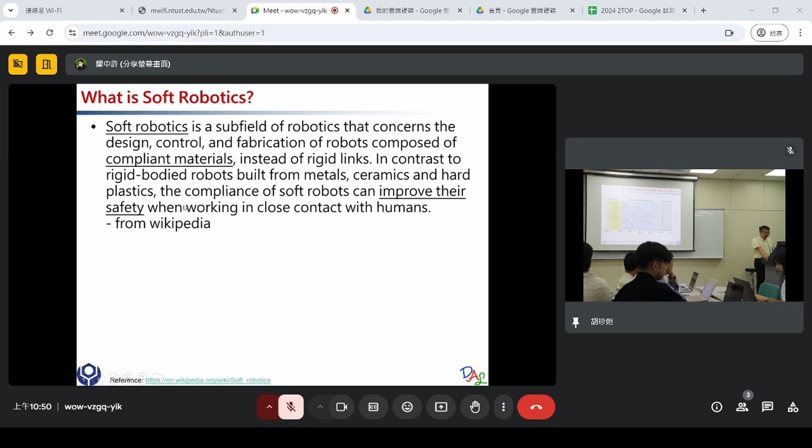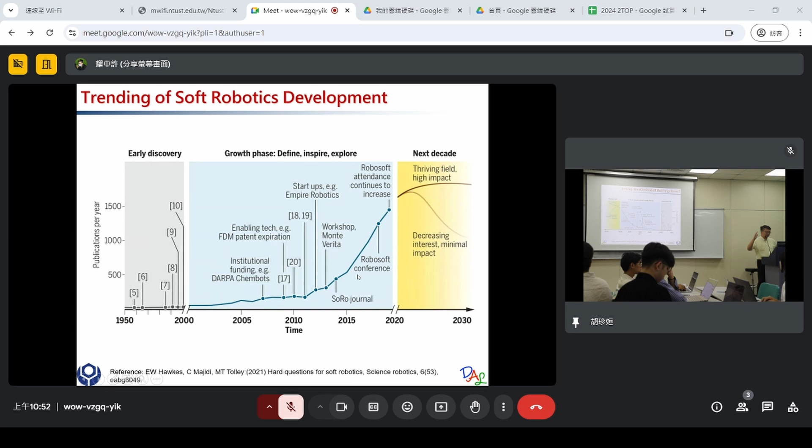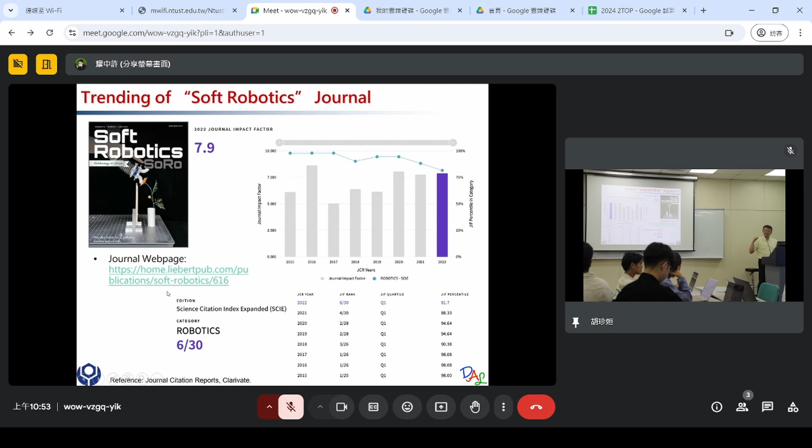Okay, so there is even a new journal. For professors, we need to write research papers and publish in a journal. There's a journal called Soft Robotics. So what does impact factor mean? Every article, every year, will be cited by other journals how many times on average. So every article inside this journal will be cited by other journals around 8 times. So there's an 8 times impact to the world. In the robotics field, this is very high, almost a top 10% ranking in robotics. So just to let you know, in the past it was not that hot, but nowadays it's very hot.

Okay. So I dissect soft robots into many different categories. We can take a look at each one of them. Let's start from the upper right corner. So if you want to make something soft, you need to worry about the materials.

Like some of the materials are listed here. PDMS is a very friendly material. I think we will use it. Do we? No, we don't use PDMS this time. But in many research, people use a polymer called PDMS. It's a kind of like a glue, and there are two bottles, and there's a specific ratio. When you mix them together, it will be solidified.

So originally, it's like a glue shape, like liquid, but with some viscosity. You can easily pour PDMS, uncured PDMS, in any container, and once it's cured, becomes solid, then you can shape it. So this kind of technique is like a molding technique. Also, Ecoflex is another kind of polymer. It's very soft, softer than PDMS, and also silicon rubber. Or nowadays, you can even print soft materials such as TPU and some other materials.

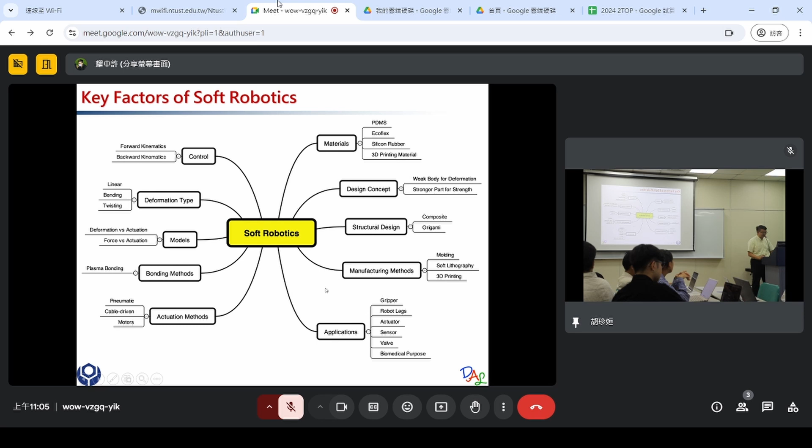Okay, so over here, there are some popular soft materials. PVDF is a pretty common, very famous one nowadays. It's a kind of piezoelectric material. PZT, also piezoelectric, and shape memory alloy. There are metal types and some other types. Carbon nanotube, very hard but very small. Over here, there are some shape memory polymers as well. Elastomers, soft ones.

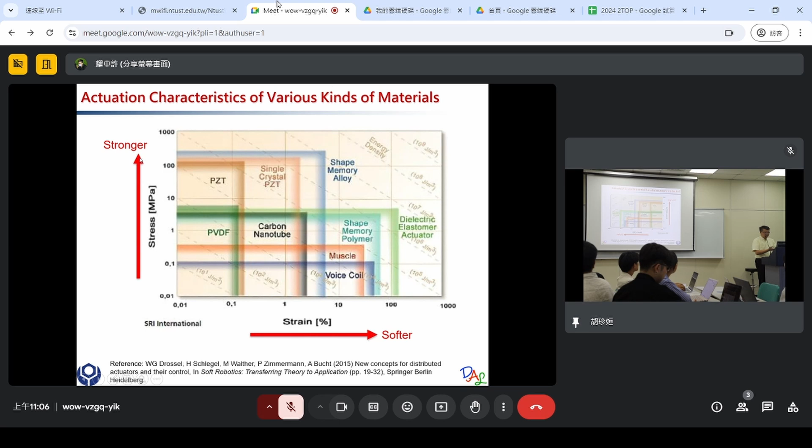So in this map, you can see we can design the softness of the structure by choosing a proper material. And each material has its limitation; its softness is within a range. So maybe you need to know about the material in advance. And once you choose a material, it can only achieve certain goals. It cannot be softer or harder. And also from this map, if it can carry greater stress, usually it's a stronger material. Okay, so there are some references on the internet you can go check out.

Now, some more examples, and also help you to know about the difference between how you drive the soft robots. These two examples are the cable ones and the pneumatic ones.

In this first particular design, this researcher used three different motors to drive the cables, and the cables were penetrating through the structure. So the structure has a hydrogel body, so it's a flat. It has a soft body inside, and at the tip, the cables were tightened at the tip.

So once you pull, you shorten the length of the cable inside the body, so certain part will be compressed because you apply different amount of forces at different parts of the cable. Then you generate a different pulling force inside the body, allowing the entire body to bend towards certain direction. Right. So that's a really interesting idea by combining soft structure and also cables.

This is a different example using air pressure. So this is like an illustration of the soft robot where you will see different areas of air chambers, like air bubbles. And you can have pressure control for each one of them by turning on or off, or enlarge or decrease the pressure at different channel. You can allow different deformation here and there. So because of the deformation, this whole soft body will be changing its shape.

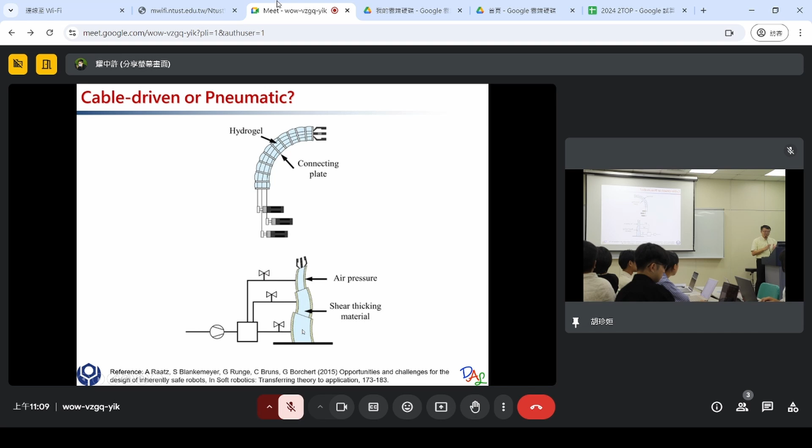But for soft ones, sometimes when you increase the pressure, it doesn't deform at the beginning. Once the pressure reaches up to a certain level, the soft matter starts to deform. So the structure dramatically deforms. So from there, you can tell the way to control the soft robot is more difficult because it's not linear. The relationship sometimes is not linear. So that's why people are working on soft robots right now.

Let's talk about the functions. If we have soft robots, are they strong enough? Can they help us carry heavy objects? And how often do we use it? Because for rigid structure, you can have thousands of motions repeatedly without breaking. But for soft ones, soft material may have an issue of fatigue if you deform too many times.

Think about rubber band. If you pull the rubber band multiple times, there's heat generated inside the rubber band, and also the heat will weaken the material property. And after just several times, maybe the rubber band will break, even though rubber band has a good potential of large deformation. Usually, rigid body doesn't have large deformation unless you build a large one.

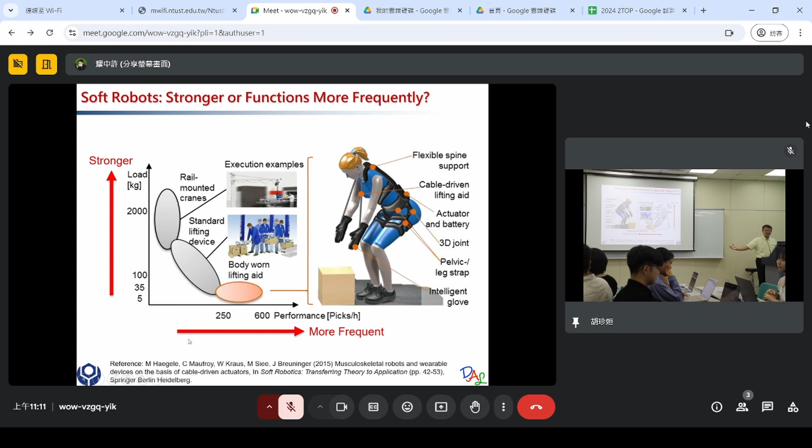But what's interesting about soft material is that you can elongate its size, but it can break. So you also need to think about your mechanical design. Do you need the structure to be strong enough, or do you need the structure to be able to deform for a lot of times? Okay, so those are the things you need to think about.

But if you try to put something in your body, you want those materials to be compatible to human, right? So designing a soft robot is not that easy. It's not like you only need to worry about strength, fatigue, shape, deformation, control. Not only those, you also need to think about when you use it. Do you need to worry about the environment? If you put it inside your body, then does it harm a human's body, right?

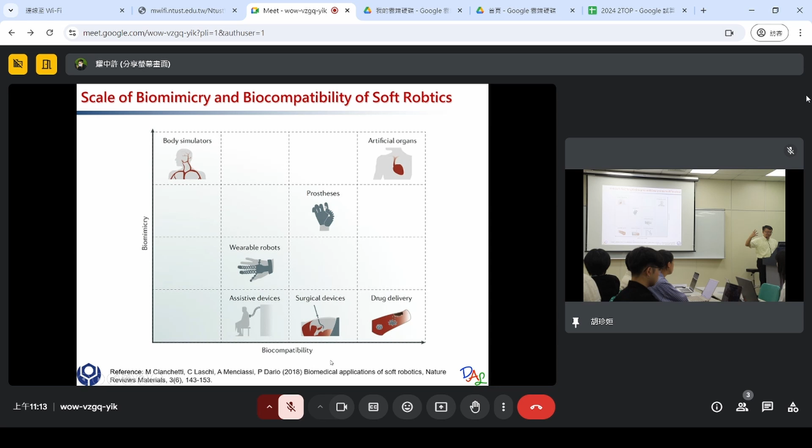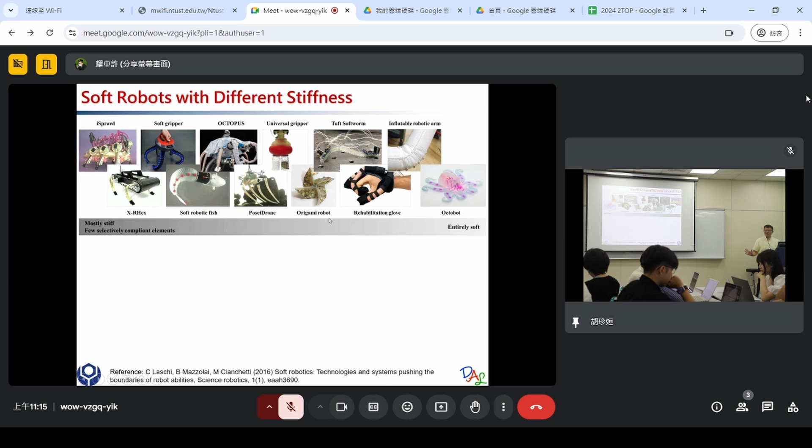So, very smart design. Over here, you can also learn from researchers. Read more papers in the following days. If you don't know how to start, learn from what has been done. Maybe there's a design that has been done in a different field, but one of the key ideas can be implemented in your own design. We will show you what we have built for the project, but that's not the only way. You are allowed to make your own design. We will be here to help you, not to say no to your design. You are free to be crazy.

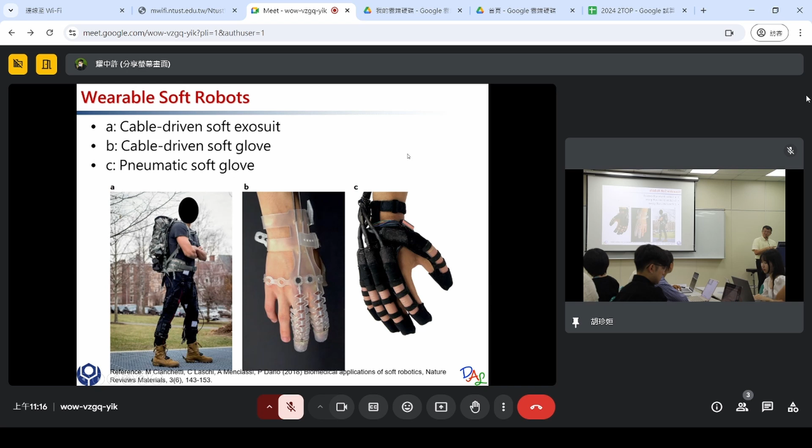Okay, so this is very similar to what we are trying to build this year. Wearable soft robots, mostly the middle one and the right one. Sometimes people build this kind of soft glove for rehabilitation, to help patients actuate their fingers. Sometimes they have difficulty bending their fingers, so they need to rehabilitate them. So the goal of this year's topic is to build this kind of soft glove, and we will use pressure to control how much bending you create. This is one solution. You can have new solutions. More details will be given later on by the TA.

Now, focusing on the pneumatic actuator, usually we try to have air channels inside soft materials. But think about this. Soft materials are usually polymers. So before they're cured, they are in liquid phase, like glue, right? You have a bottle of glue. If you pour the glue into a container or just onto the table, some time later that portion of glue will solidify and become solid. But there's no channel inside. It's just a piece of soft matter without any functional channel inside.

So the important thing for a pneumatic actuator is that you need to generate air channels inside. So how do you generate air channels? Maybe you can have a container and put something inside to block some area of the material. Once it's cured, take away what's inside. Then you have an air channel. Maybe that's a good way. But if the channel has a very complex shape, you cannot take it out. Then what do you do? So usually in the field of soft robotics made of polymers, they try to think of crazy ideas for having air channels inside the soft material.

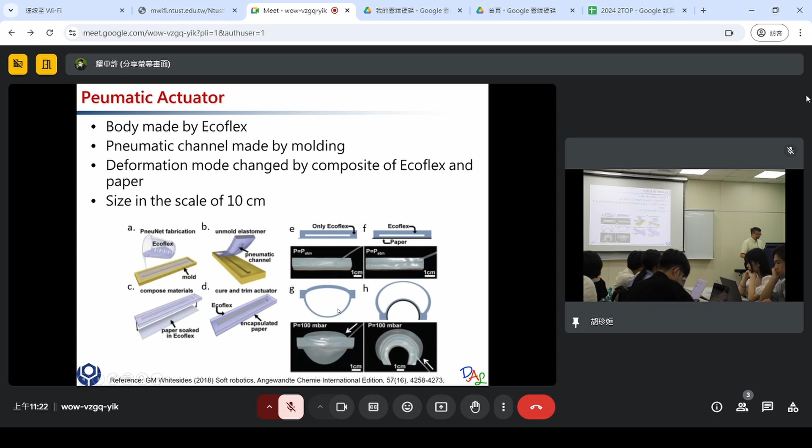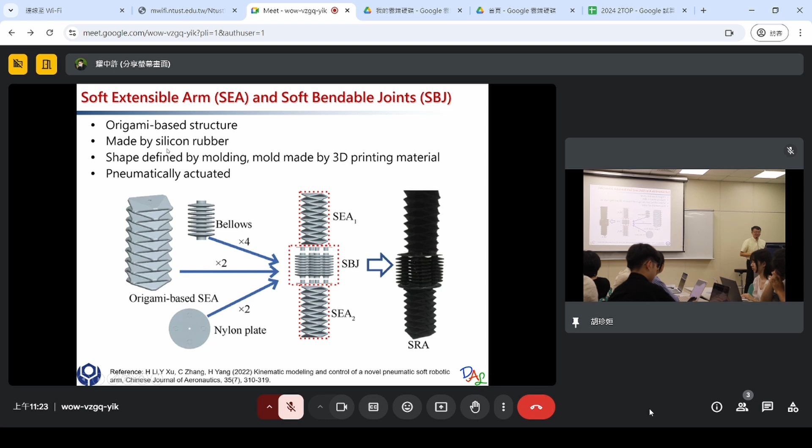Okay. Over here, you can see they can control how this structure bends, I think by applying different actuations in different channels. And like I said earlier, we need models. We need to know how much deformation it can generate by different ways of actuation. If you cannot control your soft robot properly, then it's just something uncontrolled with your high pressure. So at the end, we must have a good control of our soft robot.

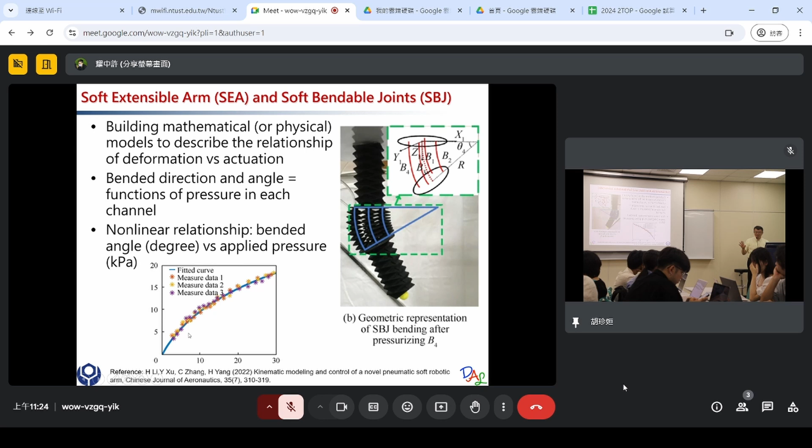And that kind of relationship is not linear. So you need to test your robot with different pressures. Then try to take measurements to figure out, okay, when I apply this amount of pressure, then the bending angle is this. When I increase it, the bending angle is this. And it's not linear most of the time.

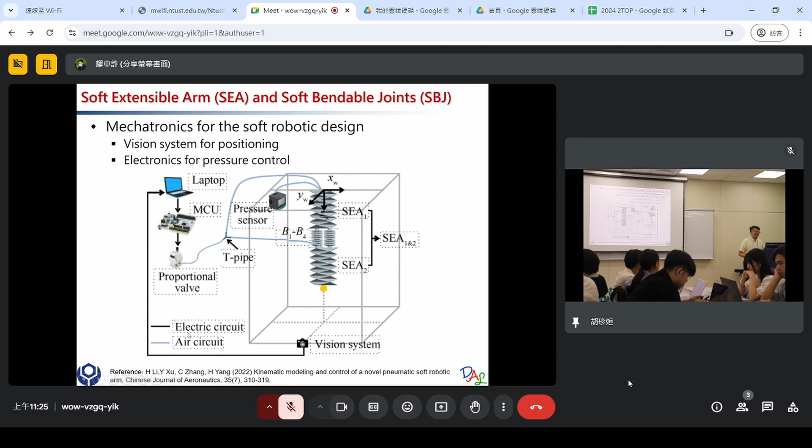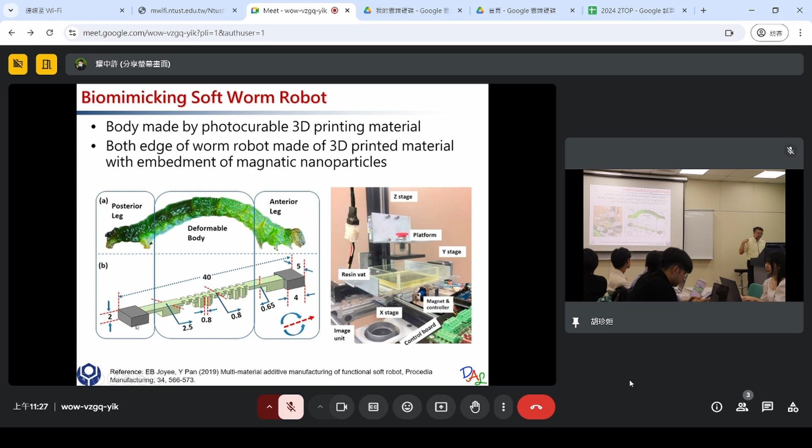They use this way to cure a design like this. And I think they use a magnetic force. They have magnetic material at the front and the back of this worm. They use magnetic force to drive the worm.

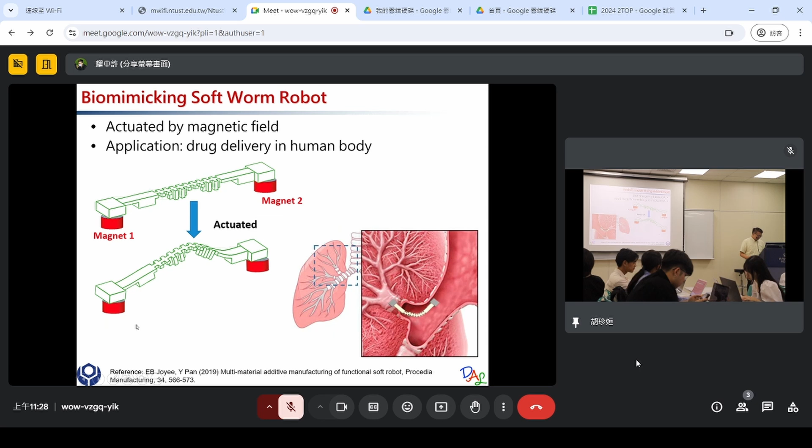And what they wanted to do is to have this climb into your human body and deliver drugs. That was the idea, but I would be scared about this: having a magnetically driven soft worm crawling through your body into your lung, maybe to deliver some drugs. But maybe one day it will be very well developed. Maybe one day we truly have this kind of medicine.

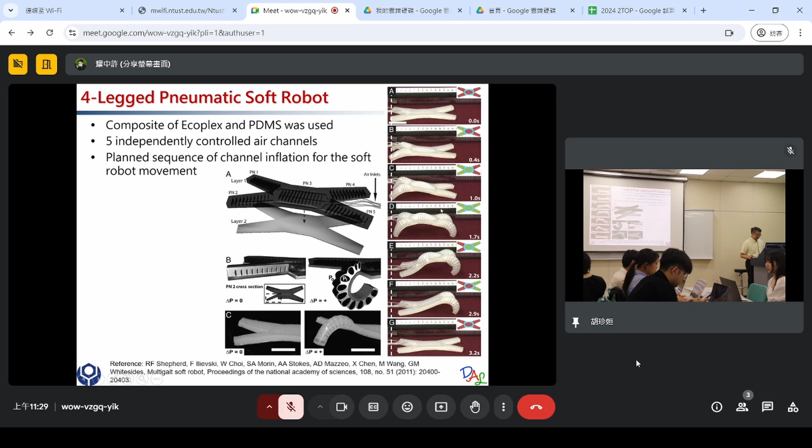Now, back to what I have learned in the past. This was from my master's degree. When I went to the USA in 2004, exactly 20 years ago, my advisor had just graduated from UCLA and came to Rutgers, became an assistant professor. I was his first graduate student. When he was at UCLA, he built some kind of micro hand, very small. The size of the hand, the longest distance from one edge to the other edge, is only 1 millimeter.

Super tiny micro hand. And he claimed it could be used to grasp the fish egg, the small one, not the big one. What's the Japanese name of the small one? I don't remember. Not the salmon fish egg, the small one, like maybe the prawn, shrimp egg. No, not the fish. Anyway, the small one. I forget the Japanese name. When he presented, he mentioned some Japanese name, a kind of small eggs, red color. Sometimes put on top of sushi or chirashi or whatever.

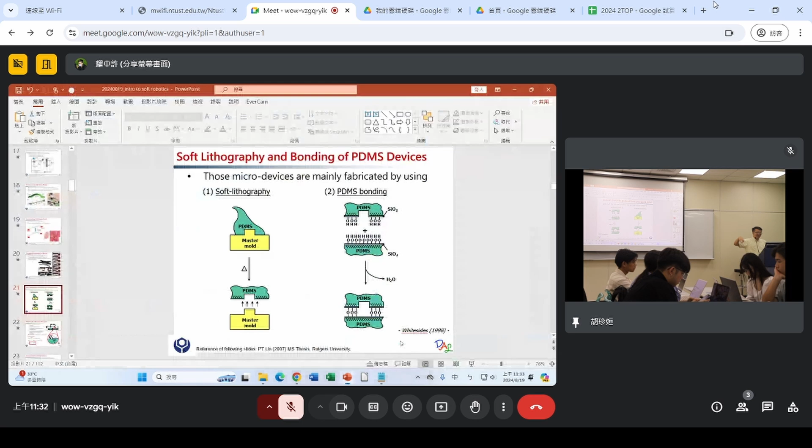But when he came to Rutgers, he tried to repeat what he had done. But to complete a micro hand like this requires a lot of research funding. So we decided to change our direction and fully focus on polymer. That was the time I learned how to work with so-called PDMS. Just like what I have drawn on the board, you can have a mold, pour PDMS on top, and because of the structure, you generate some kind of micro pattern on one side of the PDMS. That's how you can generate an air channel. But like I said, you need to bond them together.

And we realized we can have bonding if we apply plasma on top of the PDMS. It's an oxygen plasma, and plasma is very high power. I don't know how to explain it. It's high power bombarding the surface of the polymer. So at the end, the surface of the PDMS will have a bunch of OH. I don't even know how to call the name of OH, so maybe the material science students can help me. Anyway, it's kind of like being oxidized. Two layers of oxidized PDMS coming together will form a bonding, a so-called covalent bond.

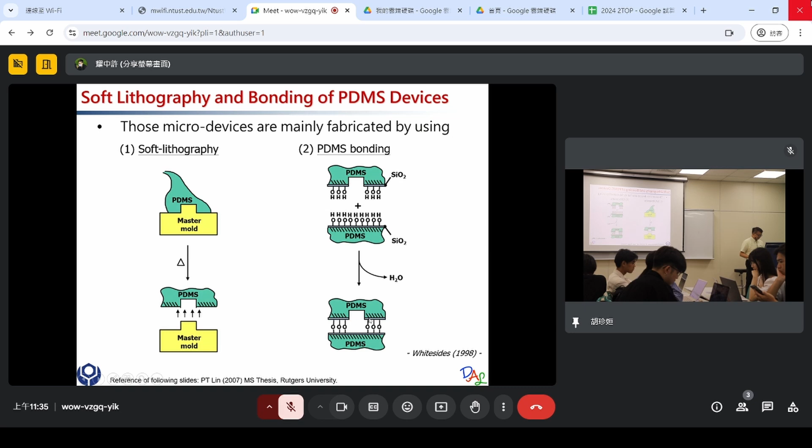So at the end, in my master degree, I was trying to measure the bonding strength. So I tried different shapes of the bonding, different parameters. And there's a standard bonding test called the blister test, like a test that blows a bubble, a circular bubble. And the purpose is to pump more gas, more pressure. One day it will explode. As it explodes, you can kind of calculate how much bonding force it has.

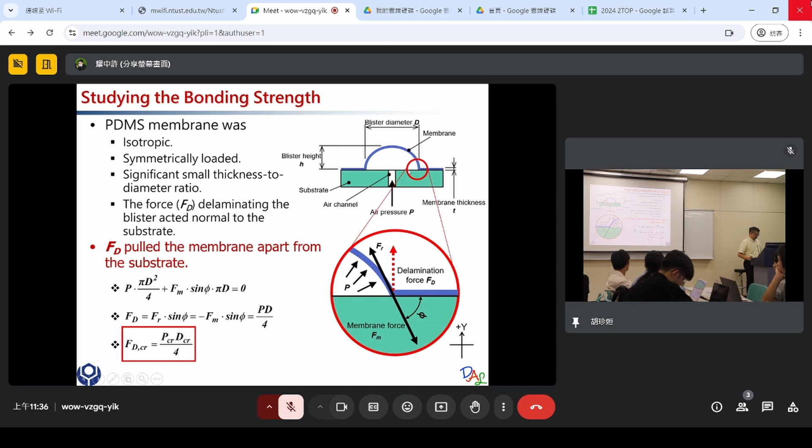So there is a simple math to represent the force balance at the interface. So it's a very simple model, and I basically generate a through hole at the bottom, and I attached a very thin layer of the PDMS, and then allowing the center area to be not bonded. So whenever I blow gas, there will be a circular region that is unbonded. That's my process. I think I can skip this.

So at the end, I use something that is very similar to what you are going to do this time. I had air pressure. I have some pressure gauge. At the time I used a circuit system I built by myself. I apply function generator, some signals generated by this device, provided to the circuit system, so it will control my pressure controller, allowing the pressure to be gradually increasing.

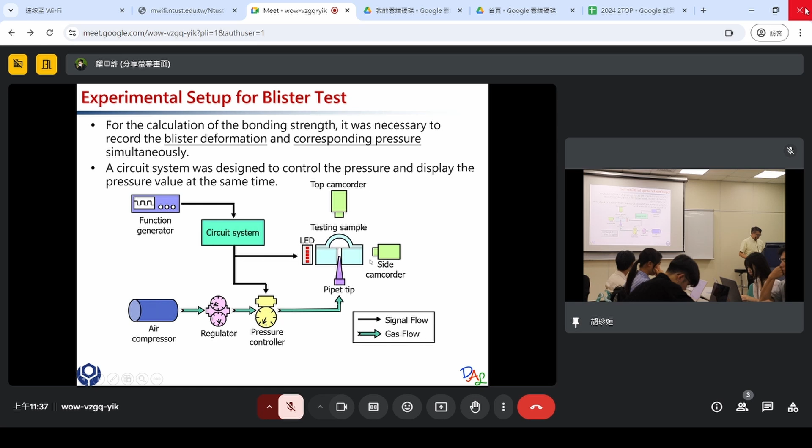And at the time, I also used a LED to show what's the current pressure. So 20 years ago, I used LED, and then I have cameras taking videos, recording the process of explosion. So that was the video. So now you can see the bubble is gradually growing due to the increment of the pressure. At some point, it will explode.

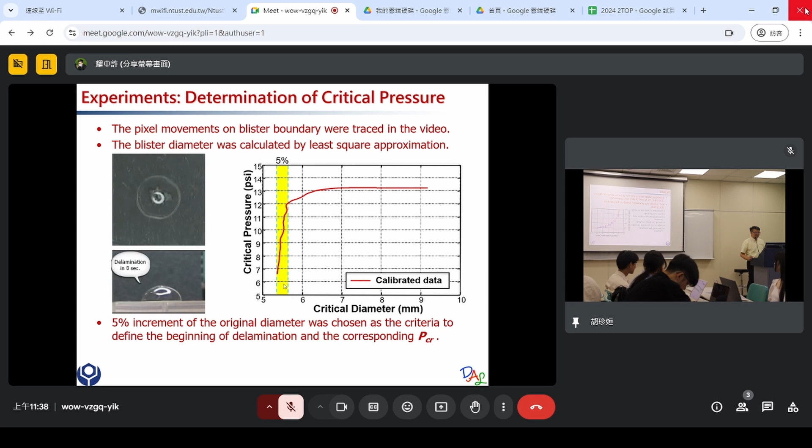So when I was a master's student, I built I don't know how many air bubbles. I have repeated this experiment I don't know how many times. So that was my master's degree, exploding the bubbles. And then, by the model I generated, I was able to calculate, okay, the oxygen bonding strength between the layers was 100 and something Newton per meter, something like that. Then I know later on in the future how strong my structure is.

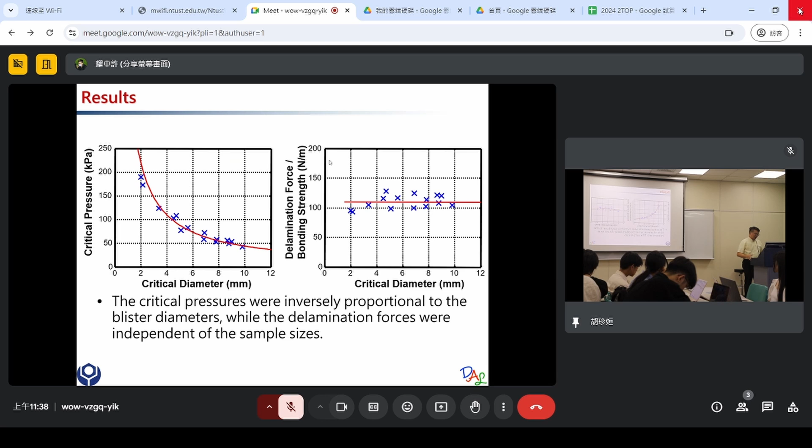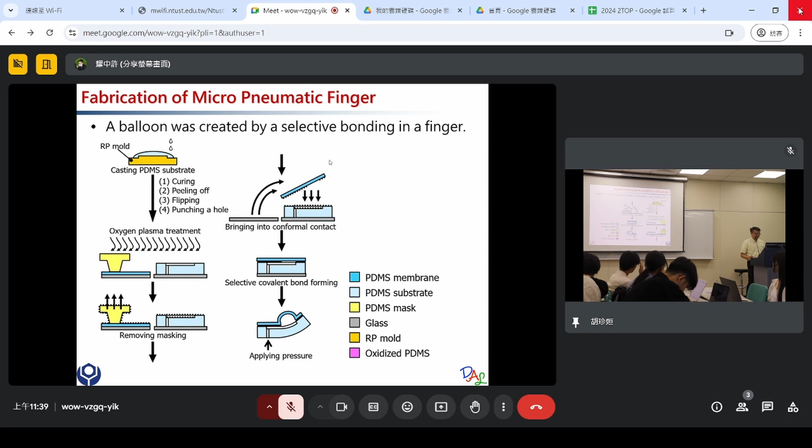Okay, and then I tried to build something like this. The pneumatic finger. I should not call it micro because it's not even in the micro scale, just a pneumatic finger. So that's what I built. The first one has an air bubble, I think, closer to the top surface. So the bottom layer is thicker. When I blow the air, the membrane on the top deforms more, and more deformation allows pulling force toward up. So the finger bends up.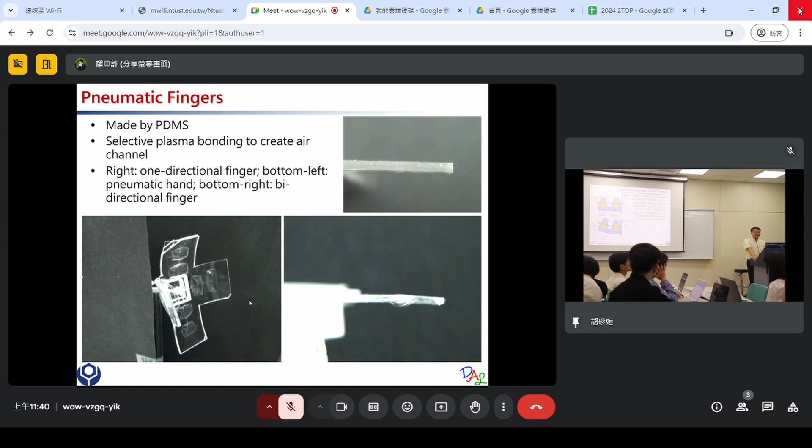And then I decided to do mathematics in PhD. I'm not a person who enjoys experiments. Anyway, I started to work on optimization, mathematical stuff. When I came back to Taiwan, there are still students who enjoy practical applications. So this is the first graduate student in Taiwan Tech who built soft fingers in my lab. And this person used two tricks.

One is to combine soft material and strong material. So he tries to have unique shapes of soft materials like this. The blue is the soft one, is PDMS, same material. The yellow are like rigid structures built by 3D printing. They are there to mimic human bones. Because if you have something stronger over there, then there will be less deformation over there. Then you should be able to see finger-like motion.

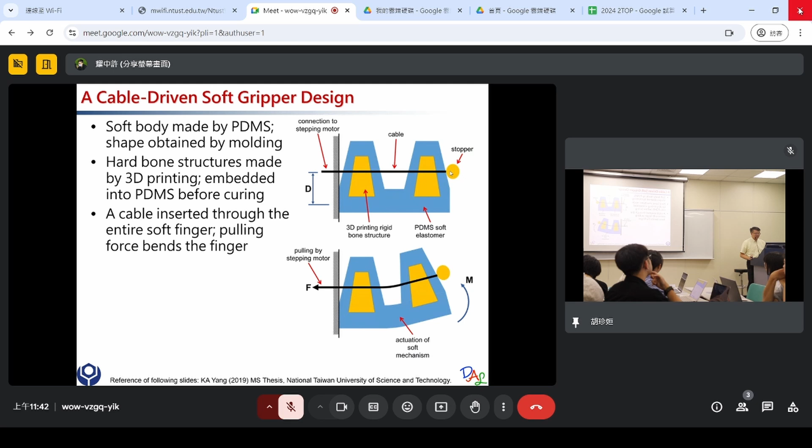But how do you actuate? So he learned from the literature. He used the cable trick. So he applied a cable through the entire finger, and then tightened the cable at the fingertip. So it's a stopper. When you pull the cable, the finger will bend, like the drawing at the lower right corner. So this is how he completed the process.

You will be doing very similar stuff for the following days. You need to make some kind of mold. This is what he made. There are some unique designs, and this is where he embeds the bone structure into the container.

So let me make a drawing. Basically, he had a mold, and he made something like this. And this is where he put PDMS. Okay, so it's like a container and put something like a lollipop, right? So put something in the middle and then pour PDMS, right?

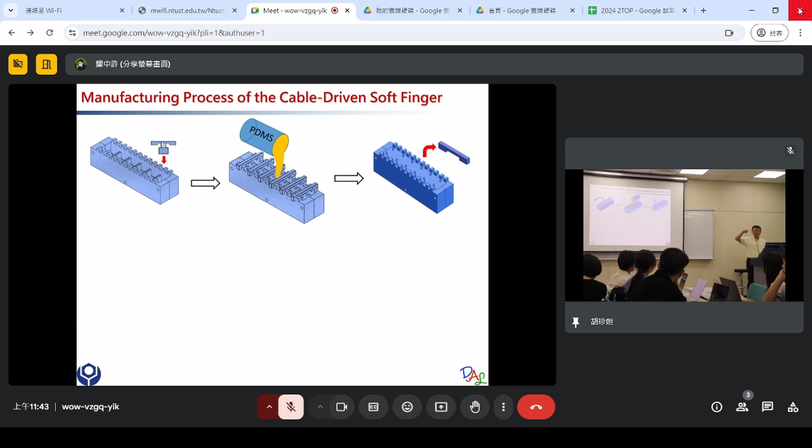Once the PDMS is cured, he will break whatever is holding the bone structure. Just cut it away. Release the finger by opening the mold. So at the end, you will have a structure like this, and he needs to put a cable inside. So he made some tricks. So there is a hole, a through hole, so that he can put the cable through the structure.

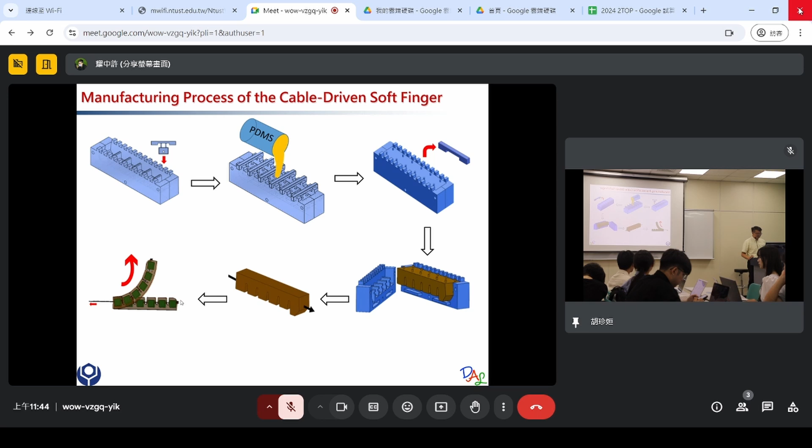And like here, over here, did you see? For the bone structure, there's a hole. He used some trick to keep the hole there all the time. And then at this stage, he can put a cable through and tighten it. So when you pull the cable, it will bend. Yeah, so that was the design.

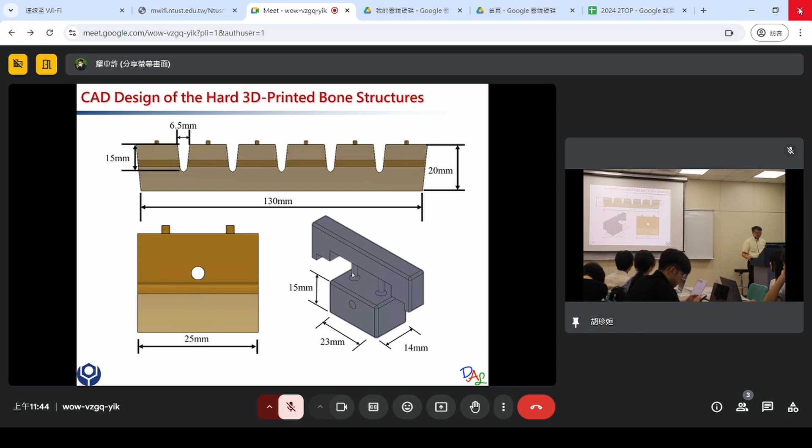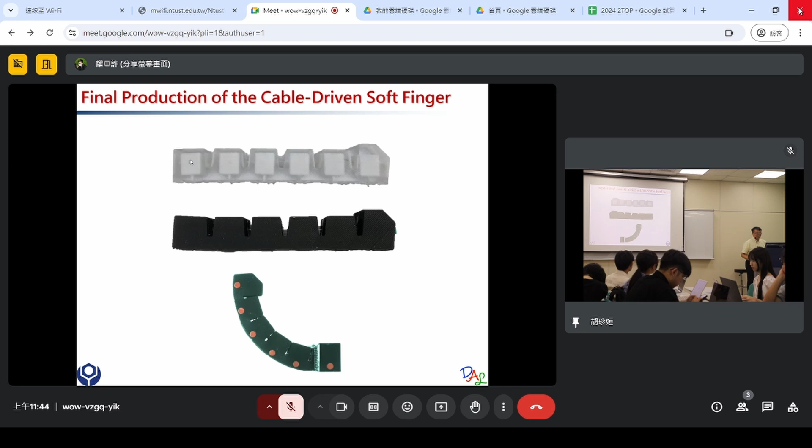This is the bone structure. There's a through hole for the cables. And they have like a thin support just for you to insert the bone. Later on, you can cut it. This is what he made. The reason why he colored this black is because at the beginning it's transparent. PDMS is transparent, so it's hard for you to present this in a research paper. So he made it dark.

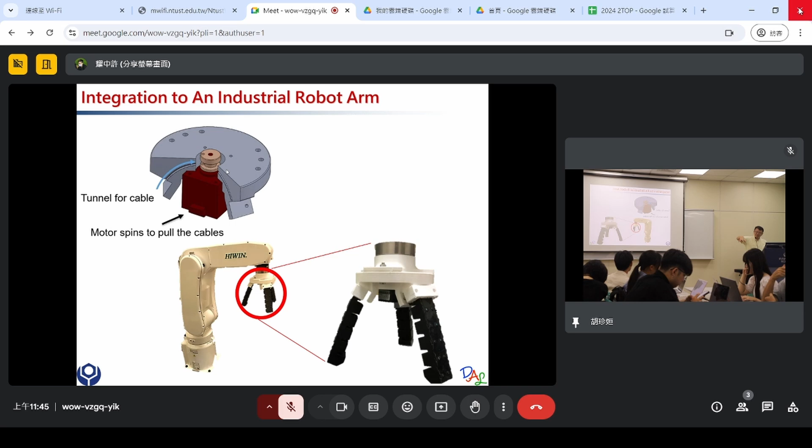And this is how you put it together as a soft finger. And he made a motor. He put a motor right here. He used the motor to pull the cable. By rotating the motor, the cable will be pulled evenly, so the three fingers will be tightened. Okay, that's what he did.

And we did this kind of demonstration at some kind of exhibition. I asked him to try this multiple times to see if the soft finger is durable. So for the day, they were giving away gifts inside. How do you call this in Japanese? In Taiwan, in Chinese it's called 扭蛋, but I don't know what it is. Yeah, so 扭蛋, yes.

So on the day, we prepared more than 600 of those toys, and people came by. They could push a button, and my student's robot would grasp one toy and then release. So in a day, he gave away hundreds of those to demonstrate the durability of this soft robot. Okay, so that was what we have done in our lab by the first graduate student.

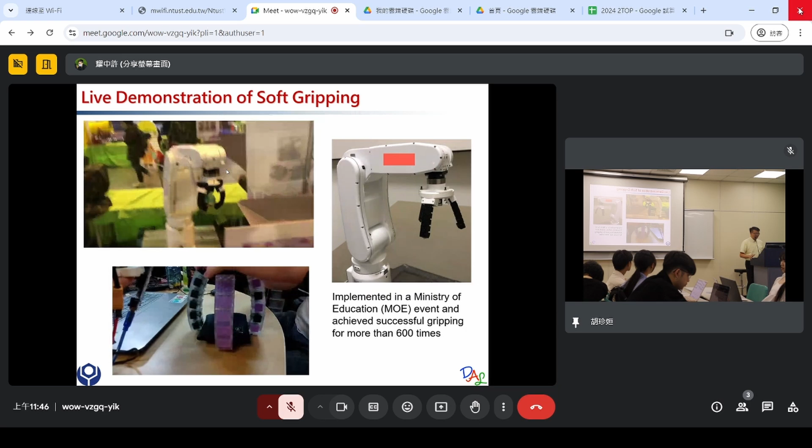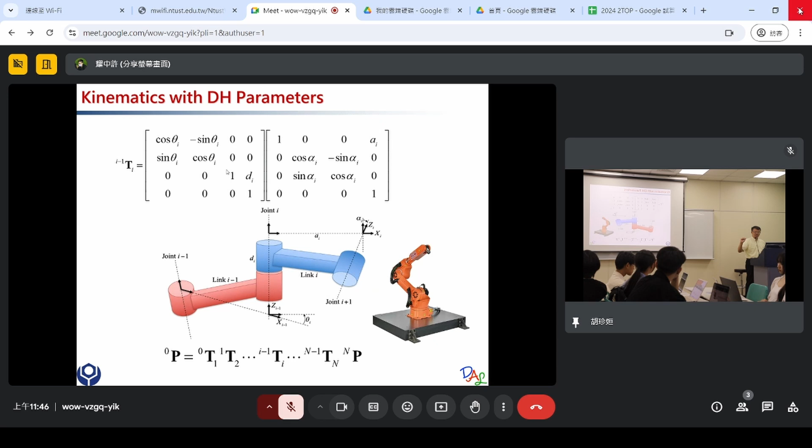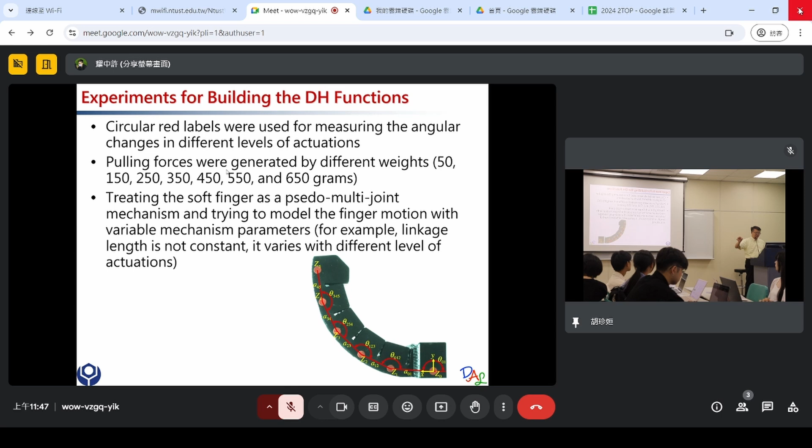And like I said, we need to control it, not just demonstrate the motion, right? So this is more mathematical. You need to know how much cable you need to pull so that you can actuate the finger to a certain level. So he did many analyses. This is more for a research paper. He measured the characteristic points on the finger and used a camera to study their positions. So that's what he did.

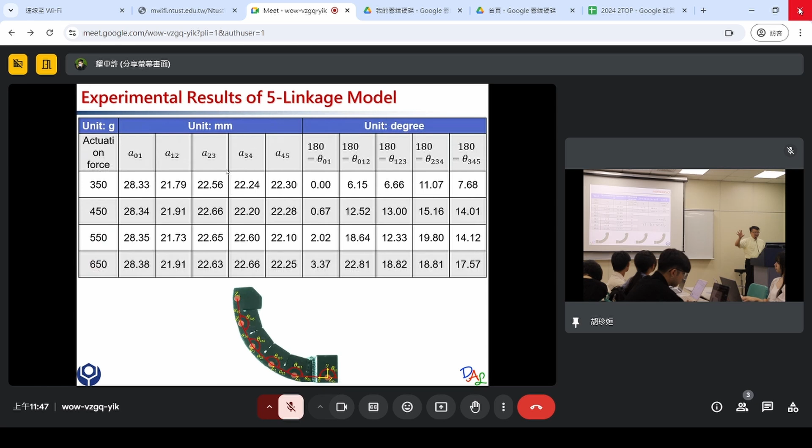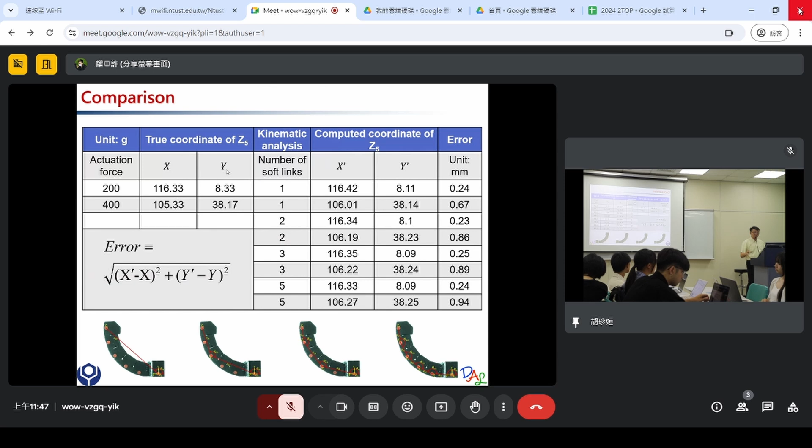Several models, right? Different models. So at the end, he will be able to build a model for how much pulling force from the motor can generate how much angular motion. So maybe later on, when you design something for the project, you also need to think about how you control it, how much is the control.